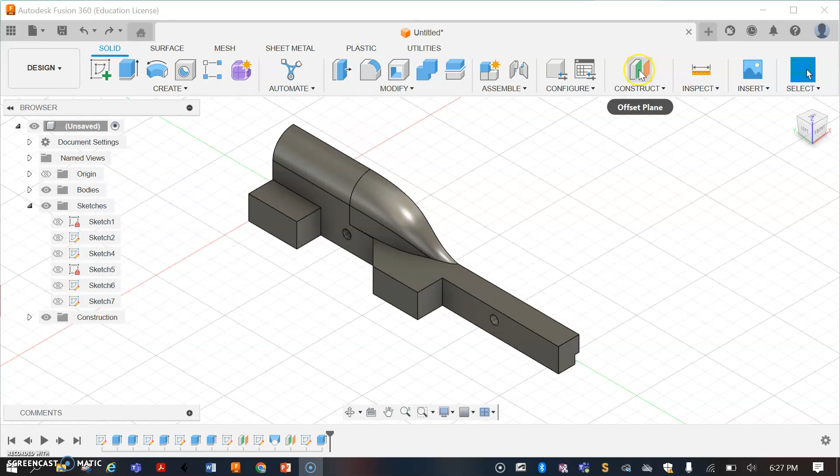So we're going to start off with the rear wings first. So to do this, we're going to go over to offset plane. And we're going to select the middle of the car there. Okay, so that's the middle plane there. And we're going to grab that and drag it over.

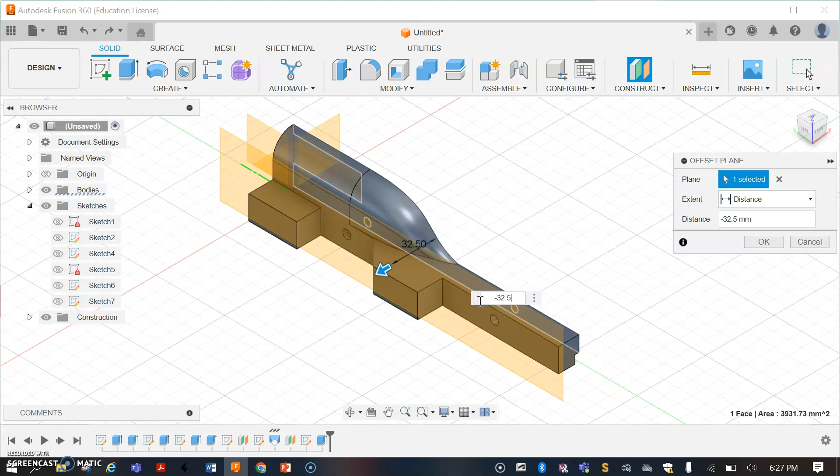Alright, so this is going to be negative 32.5. Press enter. Alright, and that'll take us back to the edge of the car over here. And then we're going to go to create sketch. Alright, and we're going to select that work plane that we just created.

Alright, so we're going to zoom into the rear of the car here. Alright, and to make the rear wing, we're going to go to create first and then use the slot feature here. Alright, I'm going to make a center to center slot. Alright, so I'm just going to select just an area around here. Doesn't really matter where you select.

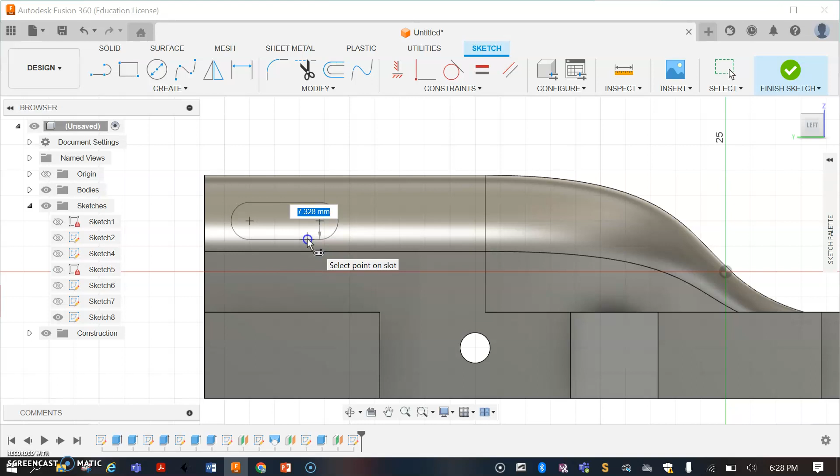Okay, now from the two center points, we can make these, I'm going to do 14 millimeters. Alright, press enter. Okay, and now as you can see, it's going to create that slot for me. So for us, we can just change this one to 5 millimeters and press enter. Okay, and that's the slot.

Alright, so what we can do is put a few dimensions here to get it into a certain position to start off with. So we can go to sketch dimension. We can go from the back of the car, so click, to this point here. And I'm just going to move it up here. Alright, so we can make this one 8 millimeters.

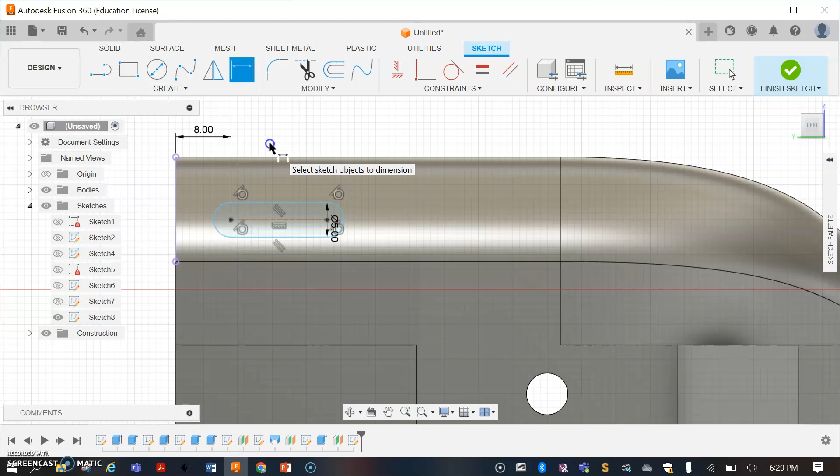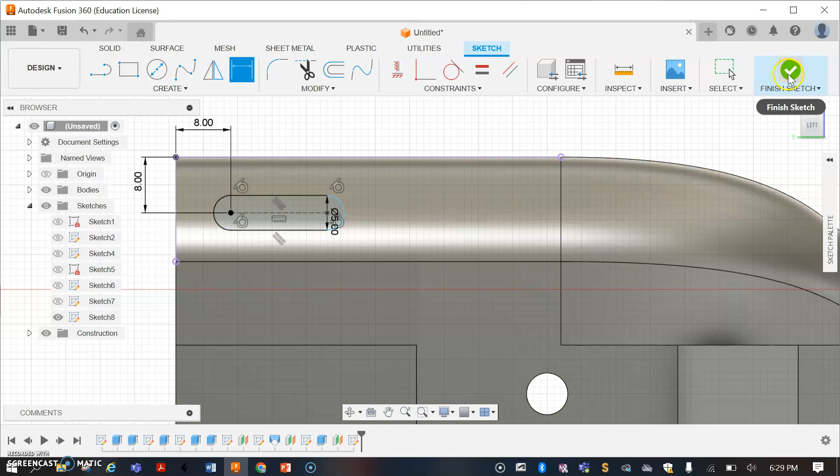Alright, and then from this point to the top of the car, and I'll move the cursor over here and select. Alright, we can make this one 8 millimeters as well. Enter. Awesome. Alright, so that rear wing is done. Alright, so we're going to go finish sketch. I'm going to click on this corner here just to rotate the model around.

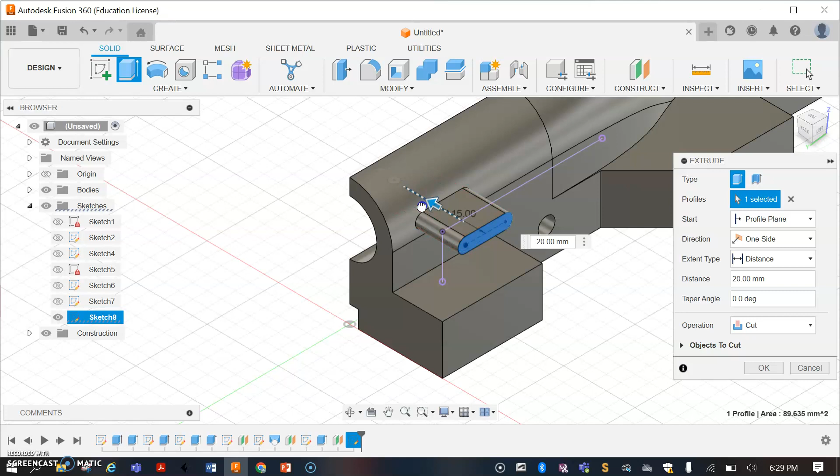Okay, now we can go to extrude. Alright, and we're going to extrude this so it's going into the car body there. So the best way to look at this is to go onto the back view. Alright, and we can start to see how far across it's coming. So I'm going to grab that arrow and I'm going to drag it so the whole entire wing is inside of the car body there. So at the moment 22 millimeters looks good.

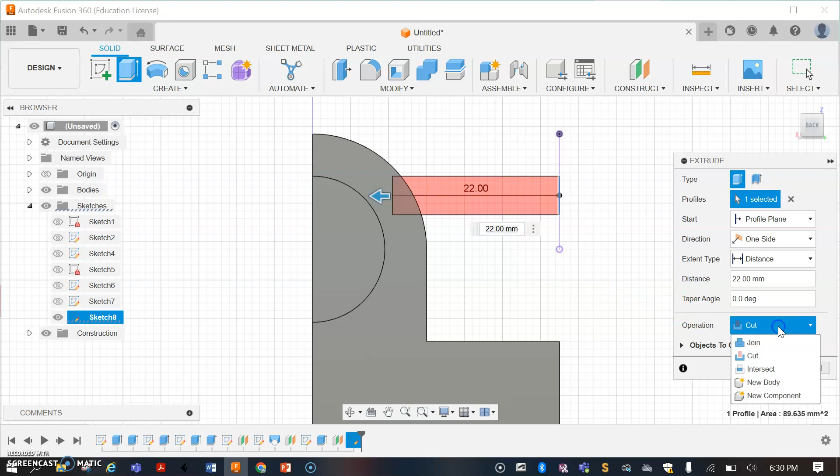Alright, so if you're not sure how far to pull it, 22 millimeters should be fine, so you can just type that in. Alright, but as you know, if it's red, it's cutting. And you can see that here. So we need to make sure this is joined. Alright, like I said, if you're not sure, you could just type in 22 millimeters just to be safe. Alright, press enter. And that should be your rear wing done.

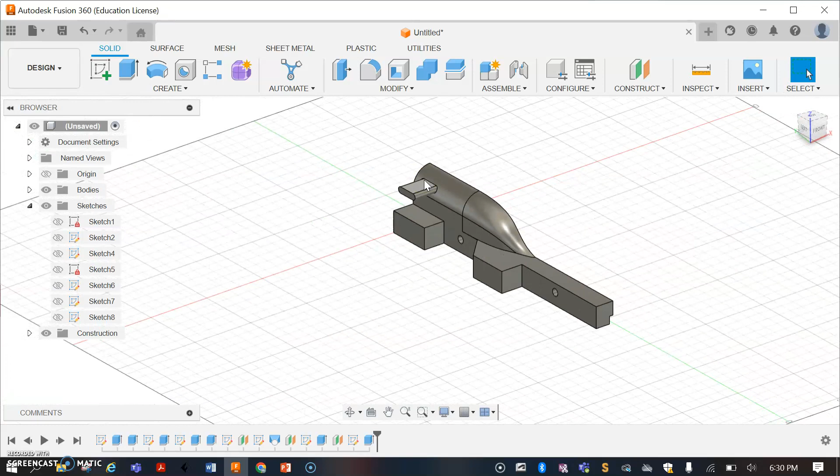Alright, awesome. So, just going to zoom out, select this corner here. Cool, so that's the rear wing finished. Now we want to make a front wing. Alright, so we're going to do the exact same thing that we just did before. Alright, I'm going to go to offset plane. I'm going to select the center line of that car again. There it is.

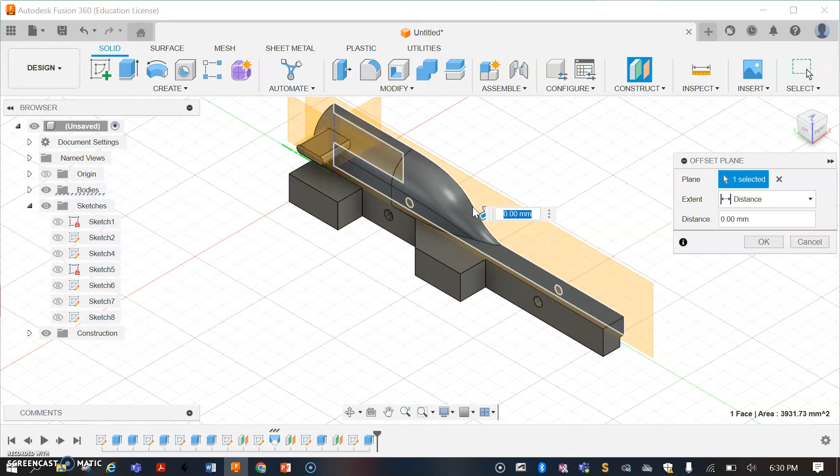Alright, and then once again, this is going to be minus 32.5. Enter. Alright, and I'm going to start a sketch on that work plane again. Alright, I'm just going to zoom into the front of the car here. So, what we can do for this one is we can get a circle tool.

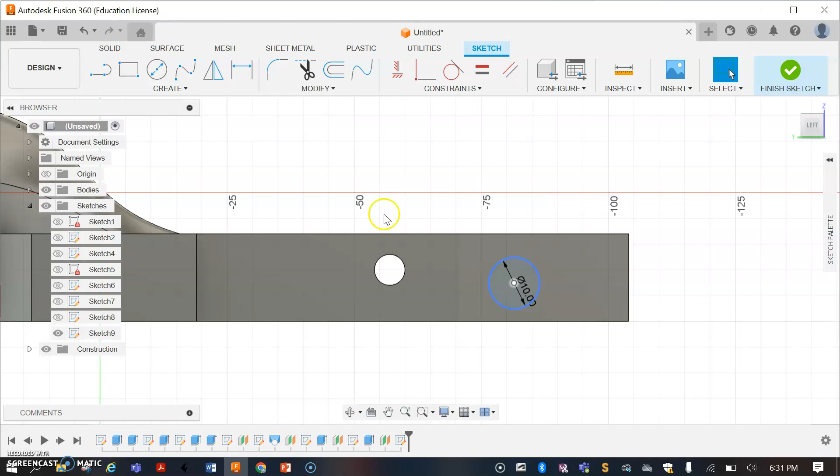Alright, and once again, I'm going to just make two random circles to start off with. So, roughly about here. I'm going to make this one 10 millimeters. And I'm going to get the circle tool again, and roughly around the front here, I'm going to make this one, we'll do 4 millimeters.

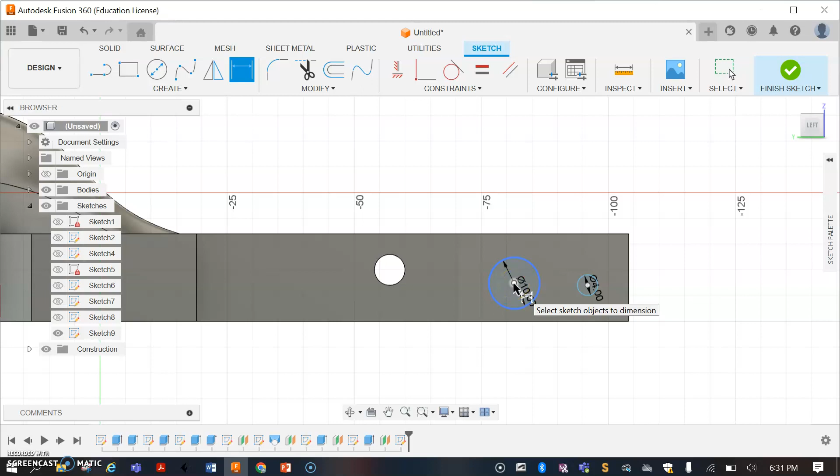Okay, now we're going to go to sketch dimension, and we're going to go from the center of this circle to the bottom, and I'll just click over here. Alright, so we're going to make this one 5 millimeters so it touches the bottom. Alright, then we're going to go from the center of this circle to the bottom of the car, and we're going to make this one 2 millimeters. Alright, so they should be touching the bottom of the car.

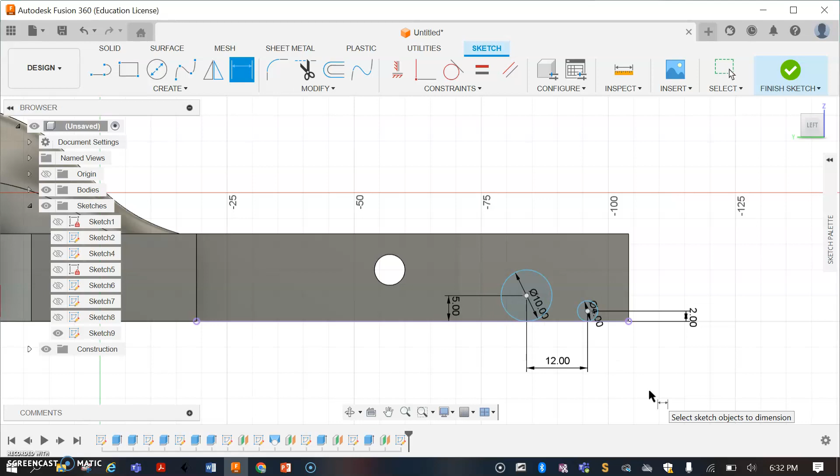Alright, we're going to go from this center point of the circle to this center point of the circle, and I'm going to make this one 12 millimeters. Okay, and then I'm going to go from the front, well, the center point of the front part of your wing to the front of the car. Alright, and we're going to make this one 4 millimeters. Awesome. Alright, so they're all in place now.

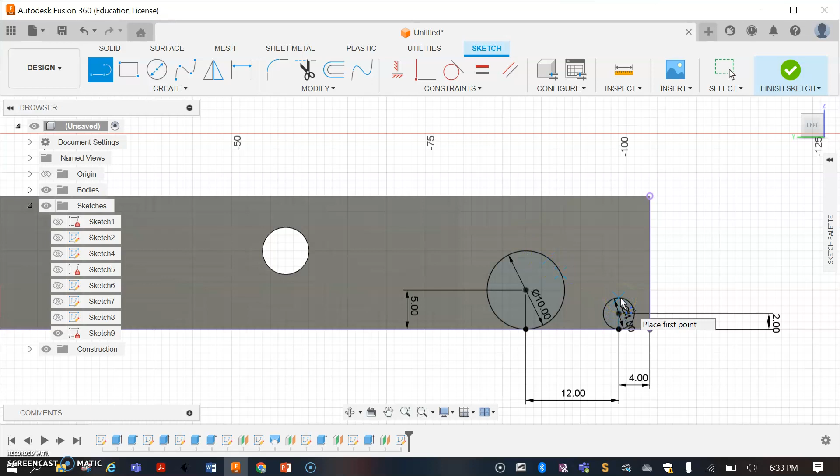What we can do is we can use the line tool to join up the middle point, so down here at the bottom of the circle. I'm going to click and I'm going to move over to the middle point of the bottom of that front circle. Okay, so they're joined together. Now what we can do is the same thing. We're going to go from the top of this circle over to the top of that circle.

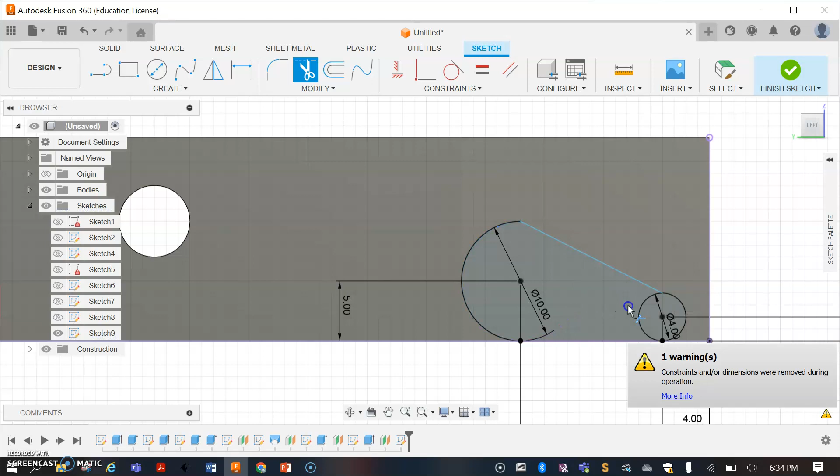Okay. Alright, so what we're going to have to do is tidy this up a little bit. So we're going to go to the trim tool, and we're going to remove the top part of this circle here that's getting cut off. Alright, and we're going to remove this line here that we no longer need, or this part of the circle. Alright, and we don't need that semicircle there as well. Okay, so we want this to be a complete shape.

Alright, ignore this line here. That line is just from this dimension. Okay, so don't worry about those lines. So that line there actually doesn't exist. As you can see, it doesn't highlight, like these other lines do, because they actually exist. Alright, so if you've got something like that, don't panic, it's just from a dimension.

Alright, the next thing we're going to do is use the tangent tool. So click on that one, and we're going to select this semicircle. Alright, click that one, and now I'm going to click over to this line. Okay, you can see now they line up perfectly. Okay, we just need to do the same for the front. So we're going to click on this one to this line. Okay, now you can see it's a nice, perfect shape all the way around.

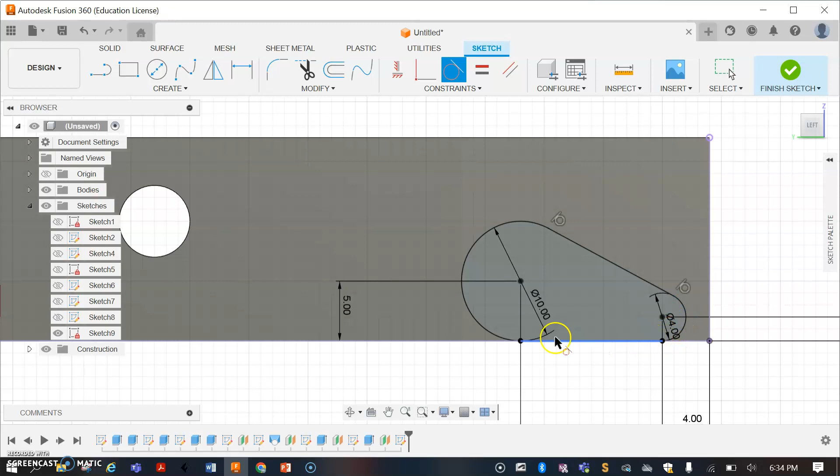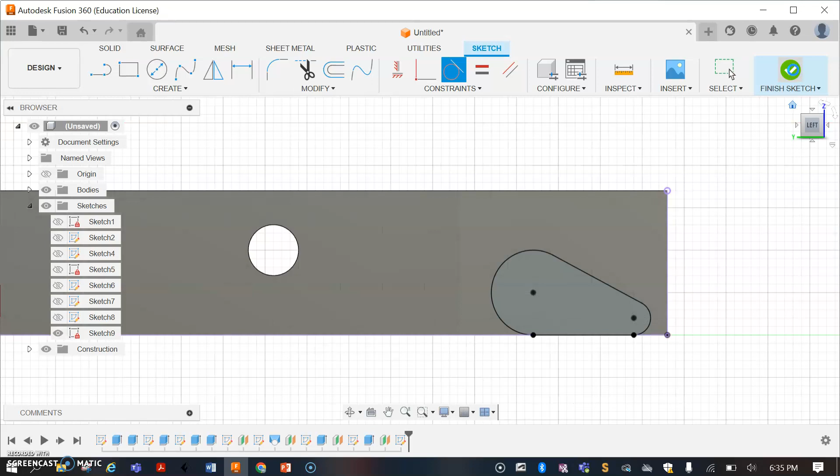Once again, that is just from the dimension. You can see there's an arrow pointing here, an arrow pointing there, and it's 4 mil. So yeah, that's not a line, so don't stress about that. Awesome. Alright, so that's done. So we're going to go to finish sketch. And I'm going to click on the corner of the box here. Alright, I'm just going to zoom out a little bit. Alright, so we need to extrude.

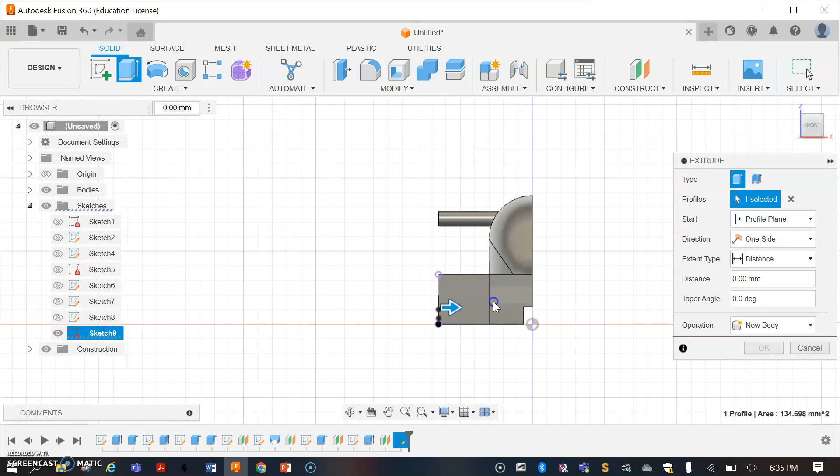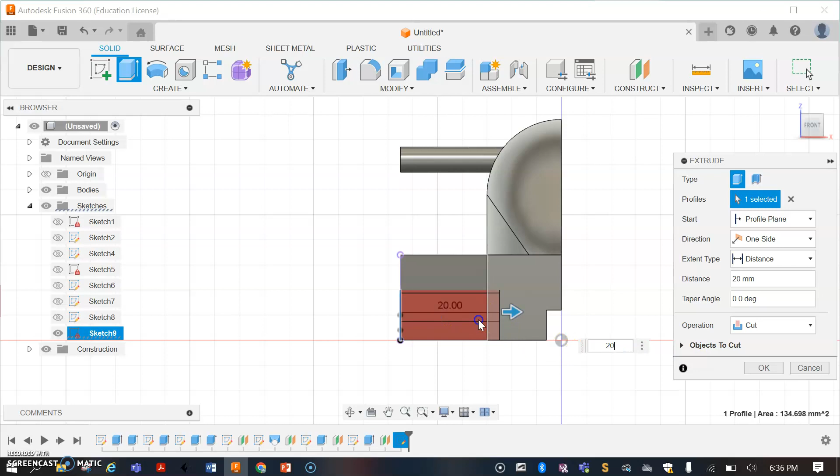Okay, and once again I'm going to click on the front of the car this time and zoom in a little bit, and I'm going to grab that arrow and drag it across. Okay, and you can see that it's almost meeting up to the body there. Alright, what we can do is go all the way across. Alright, so I might get you guys just to type in 20 to make it a bit easier. Alright, once again it's turned red, so that means it's a cut. Alright, so we have to change that to join. Alright, press OK.

Awesome, so you got your front wing, right, you got your rear wing. Alright, so now it's starting to look like a car body. Alright, so in the next video we'll learn how to mirror. Alright, so the whole car is almost complete, and then we can do a few other little things to keep improving it. So stay tuned.